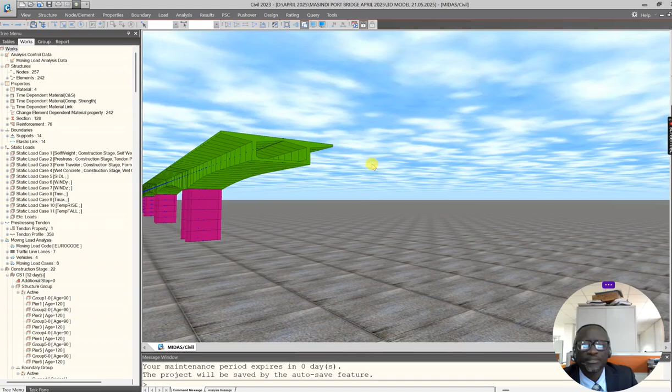This is a balanced cantilever of about five spans with twin columns, pier columns, and there's a tapering deck, which deck is a single span, not single cell box girder. This is the shape, and it's actually across River Nile.

It's a bridge under design, but this was an independent design check. That's also a learning session - we have to also learn. We have a consultant doing the design, using CSI Bridge. For me, I said let me also use Midas and see how best we can generate results, so I did that, and now we are busy reviewing.

We compare, we normally compare the made presentation. We also do and look at it, but definitely these are very senior consultants in Africa, maybe also across. The consultant is called DAR. This bridge, I think, is crossing at Masindi Port. It was designed by 2013.

In total it's 514 meters. It has a center arch piece - I would have shown you here, but there's no need, we'll get to it maybe one day. It's a full twin steel box girder, composite box girder, and the arch also is full steel box. Then we try to look at issues to do with cost.

I think the cost of steel post-COVID really skyrocketed. So when we asked the consultant to do a value engineering, putting into consideration the policy that government of Uganda has to buy Uganda product and build using Uganda product, we discovered that for structural steel, almost 70% of material would be imported, and therefore with this local content policy we wouldn't get anything.

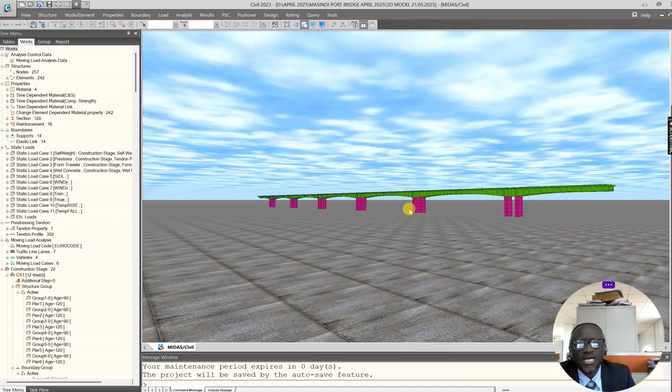So this one now is 550 meters, the outer span 52 meters, and interior span basically 90 meters. This is integral pier, though the outer span has a continuous, simply supported design to allow movement. But this one, for me, with my independent check, I moved in with this all cast all together, integral in functionality. So basically that is briefly about that.

Let me now proceed slightly. Okay, so this is the view of the balanced cantilever. Of course, in reality, from the drawing, it is doming, because here it would be like zero towards the middle, almost like maybe a meter or two, and the central span is done to take care of navigation.

I think Masindi Port in the 70s and 60s was known for navigation, and therefore we have to observe the issue of navigation. Also most of our bridges now crossing the major rivers like River Nile, Lake Victoria, Lake Albert, Lake Kyoga - it has to take care of navigation. So we are very keen on that, because we also have some knowledge on long span design and construction, and so that we have to take care of.

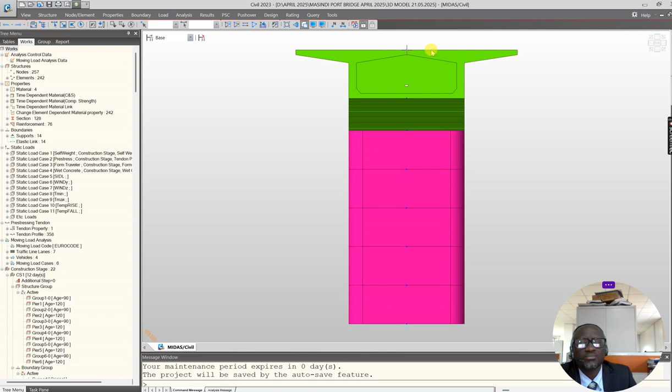So this is the bridge. The typical pier is about 7 meters. This is about 13.6 meters. When you look at it, it has a tapering - it tapers here, and then is thicker, deeper over pier support, but narrows to the closing point. This is the close around here. With a span of 90, that means this is about 45 from the center. Okay fine, that is briefly about that.

But before I go into the details of just briefly what modeling is all about, I also needed to take you through - just to feel, you know, when you are reading, sometimes you also have to do some hand calculation. We don't need to depend on handwriting, we don't need to depend 100% on typing and copying. So for Balanced Cantilever, there's some book which I read, and I got some notes - I think we shall get the reference down. So when you talk about Balanced Cantilever, here is the application.

So these Balanced Cantilever structures are bridges which involve high pier support, with wide spans, spanning wider gaps and deep valleys, areas where use of scaffold propping is a bit difficult.

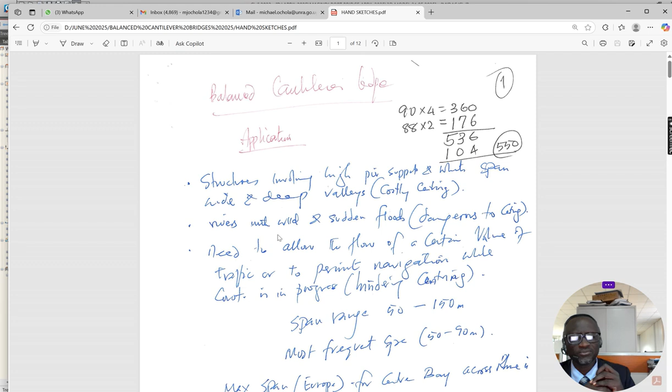This Balanced Cantilever normally spans between 50 to 150 meters. But as you will see, we have bridges that have gone past 150 meters, with center spans of 200, 230, 200. The record-holding bridge now, I think, is in Japan. We shall look at it.

The most frequent span is actually 50 to 90, because of constructability. Normally if the span goes towards 150, as you build the bridge deck, you start with the support system, then you symmetrically cantilever, moving outward from the pier support.

It has to be balanced. So if you have an error in the length, or if you're doing segmental construction and you place one segment while the other is not placed, you create imbalance. That becomes eccentric loading, combined with construction load and equipment on top, and that becomes a problem.

With long spans, normally by the time the closures are meeting, you can definitely get problems with high stress areas like the pier support system and foundation pier, because with the pile system you will have a push-pull effect, and all that needs to be taken care of.

So the most common span is 50 to 90, or 100 to 120, that is fine. The maximum span now for the center bay across the Rhine is 208, while the world record is 240 meters for the middle span.

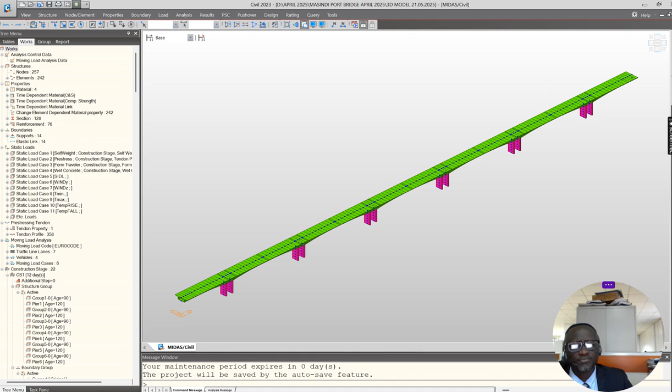You saw it from here. The middle span of the one over the Rhine is 208, but the world record is 240 at this point. That is what they're saying here. It is called the Hamana Bridge in Japan.

It was completed in 1976. You can imagine, completed in 1976, and if you look today, it's basically close to 49 years now.

Then this is the Bendorf Bridge. You see the center here - this is actually the one. This could be the one with this center bay having 208, and even 208 here.

Then you also have Hikoshima in Japan at 236, and Bendorf 208, Urato in Japan. I think Japan has longer spans than 150 than any other country in the world. Philippines has 240, also sharing the record. Urato Bridge is 230 in Japan.

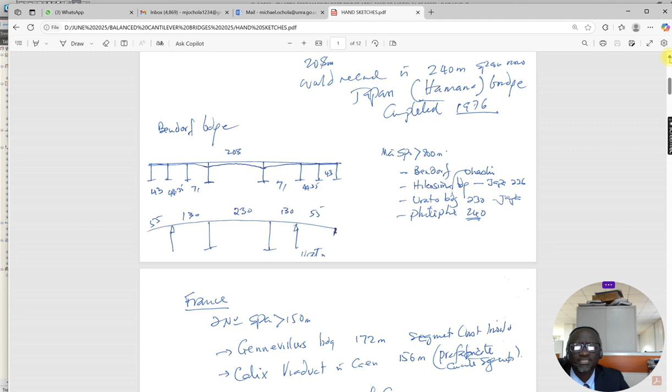So some of these sketches - in France you have 2 bridges with span exceeding 150. I think this is an option of a bridge that can actually dominate, especially for us in Africa where we have river bridges, but the rivers are not very wide. So it could actually work there.

So now you can see the different spans. In France you have the Gennevilliers Bridge at 172 meters, segmentally constructed, and the Calix Viaduct in Caen at 156, with prefabricated segments. Now, concrete, as you know, is very heavy.

Some of these bridges, you can see here, are 140, 171 meters. They use what they call lightweight concrete to reduce the weight. Though lightweight concrete has its own functional and resistance challenges, they try to reduce it because the cantilever effect is too much on the pier support.

And you see it is actually simply supported, so definitely you have to do a bit of supporting at the pier support here. You support it all the way around the pier table, then carefully place your overhead gantries.

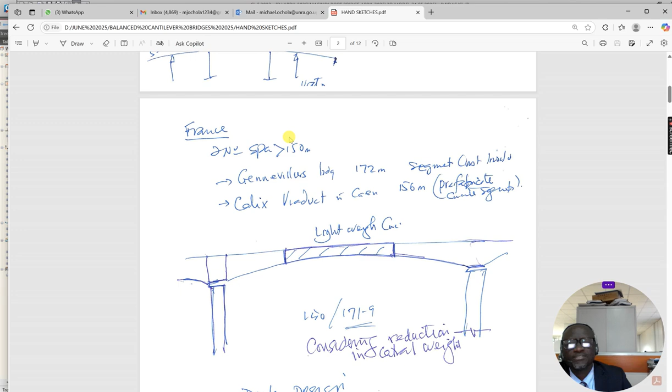If it is cast in situ, then you use form box traveler. But sometimes they use overhead gantries if it is precast segmental. This is the introduction if the span exceeds 150 and above, it's important to reduce the weight.

Then the deck design, you can see here they are saying this bridge is built symmetrically outwards from piers to avoid high asymmetric overturning moments in the piers. It has to move uniformly with no difference in loading as you go outward. This is your pier, and then you are moving. Every time you put a cast, you move.

You keep extending your form traveler until you reach what they call the closure point, and then you tie. When you tie, that's when continuity comes. So the cantilever effect is reduced, it becomes continuous once you do the closing. So balanced cantilever is actually coming from the balanced construction process outward from the pier support until you close.

Build symmetrically outwards from piers to avoid high asymmetric overturning moments in piers - not possible in practice. So the piers sustain some stresses and bending. That is why when you put the foundation pier pile cap, then you build the pier system up. Before you start moving out, the construction of the pier table has some propping system.

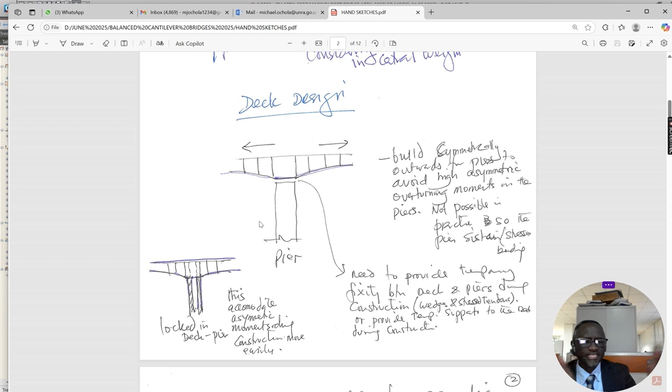Balanced cantilever - you have segmental construction, and also cast in situ, whereby for cast in situ you use the form traveler and move, while for segmental they use overhead gantries because now you have a prefabrication yard. You fabricate the segments. We shall see the dominant sizes used in the industry.

Use of temporary support needed for asymmetric construction. I was trying to look at that bridge across the River Nile at Masindi port. They have 52 here, 88 and 90, and also a bearing here. Here you have continuity, but before you reach here, there's an imbalance and instability here.

So you need a better system - once you are done with the pile cap, you build this up, and when you start construction of the pier table, you need to prop this system to achieve some balance, because if 88 is to be balanced, half of this, if this is 45, this remains 45, from that remains 43, and 43 here, and that means you need to make sure this balance is done under false work.

But towards the abutment, the next pier, from pier 2 onwards, they are monolithically cast, locked in. So that is how you look at overturning implications.

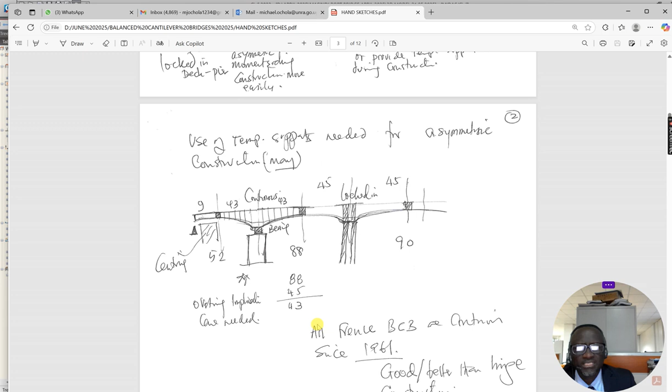This has to be taken care of, properly simulated by the contractor, cross-checked by the engineer and the design also, and then carefully observing creep and shrinkage issues, temperature issues, and eccentric loading in terms of live loads and the rest of it. I also looked at some literature, and I found that actually all French balanced cantilever bridges...

Construction since 1961. It's good, that's how they did it, and better than hinge construction.

So vertical deflection, as you ask. This is now at a closure. They are actually trying to say, once you build your bridge towards the center now, because there's imbalance, for you to have proper vertical alignment and horizontal alignment.

You have to control every stage, considering shrinkage effect and creep effect, wind issues, and many things. So you keep checking—accuracy is very important. The survey has to be done well, and then construction monitoring, observing the difference in temperature. So the vertical deflection control, and then you have to look at how they do that.

Keying—sometimes called the closure or keying segment—it provides continuity. Once it is closed, it provides continuity of the deck, ensuring integration by cables tensioned after hardening of concrete. So you have to tension that section after hardening.

The cables are located in the lower flange. So now once it closes, it becomes statically indeterminate moments which must be considered in your design of the deck. When the thing locks in at the closure, the structure becomes indeterminate.

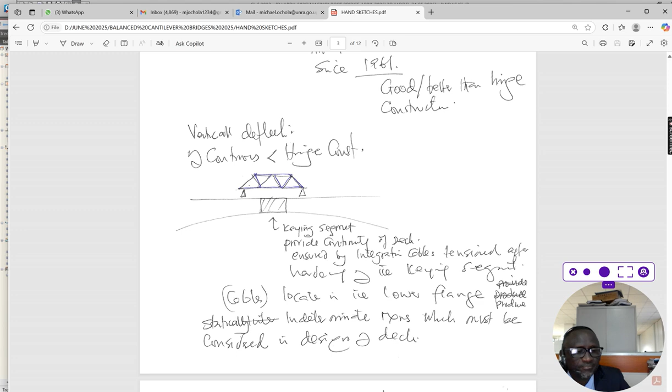That is something that I picked, which you can also look at and read more. Bending moments due to linear phenomena, variations of temperature, moisture, shrinkage effect—all that need to be considered, and may be increased if construction takes place with a large difference in temperature occurring between the upper and the lower flanges of the cantilever.

So at this point, because of these varying loads—moisture, temperature, shrinkage effect, wind and the rest—you have to have a temporary tensioning here to keep it. Once the two arms are now meeting, because it will keep moving, it's also moving, it can move like that, so there is a vibration.

Aerodynamic effects come in. I have not done that, but at least borrowing from the Nile Bridge and also reading about aerodynamics, definitely something will happen.

So the temperature—if it is hot, the bridge tends to breathe in, so it goes bigger, it tends to move. Then it also breathes—it contracts when the temperature is low and expands when the temperature is high.

So with that, wind also is happening—upward wind, sideways wind. Wind can have an angle of attack, from zero, moving down, moving up. You have seen that curve. So definitely here you have to be careful.

So there is temperature variation that can cause deformation, and therefore fixing the top of the cantilever ends to avoid deformation affecting closure. Temperature variation affects the control. So it is very, very important that at the closure, please, you have to be careful.

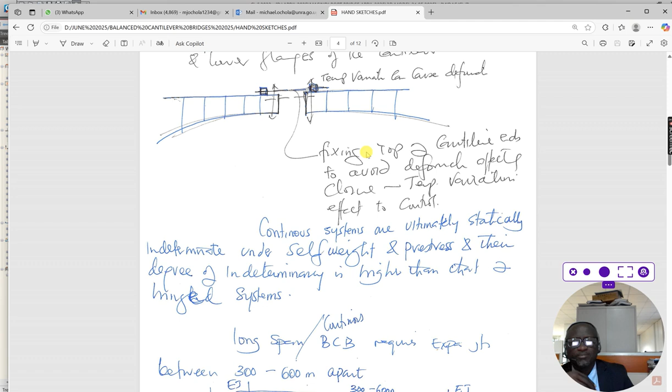Experiencing challenges arising from the use of hinges or hinge support, where these cantilevers come at this point, you don't join it—you have a hinge support here with some bearings. So you find leakage, and then failure happens here: shrinkage problems, creep issues, deformation, and many things with time, due to cyclic load and temperature and the rest of it.

So all that always causes a bit of challenge, and so you find that the continuity, in a way, tries to erase that problem.

So that's what they were saying, that continuous systems are ultimately statically indeterminate under self-weight and pre-stress, and their degree of indeterminacy is higher than that of a hinged system.

So long span continuous bridges could require expansion joints between 300 and 600 apart. If the spans are not in that range, then you don't need to have an expansion joint. Now you can see the use of expansion joint midway.

This one has implications with time due to creep deformation, shrinkage, and the rest of it. If the expansion joint is not done very well, leakage can start from here, and being highly stressed, you can get a lot of problems. So this type of construction is more or less being discouraged in a way.

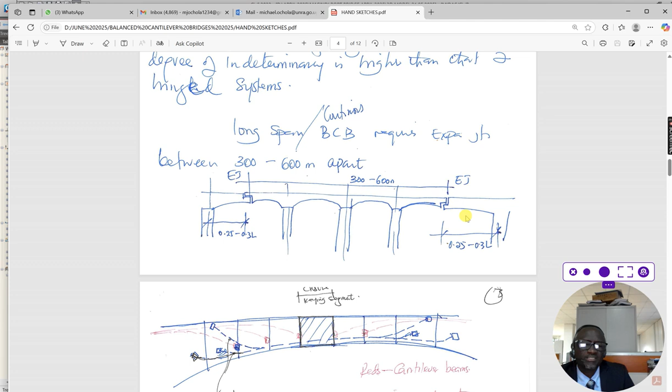It will actually move towards the support if you want, and they are telling you these are the requirements where to place some of these joints, so you can have a look at that. Then down here, this is also the closure or keying segment.

So they are telling you how to detail. How do you detail here? Engineers do the design, contractors do the construction, but you must have a good detailer to understand, and then the supervisor must be aware too.

Here they're telling you there are integration cables, then you have cantilever beams, and the cantilever beams coming from here, then the closure. Because the bending is now downward, this part becomes tension, here becomes compression in a way, and when it closes, if not, up would be tension, down would be compression.

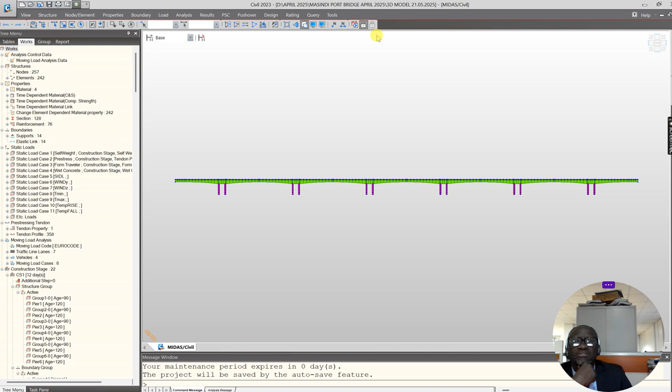But now once it closes, it becomes continuity, and this is what would happen. If I can quickly take you back here - oh, I did not run this one, sorry. I would have actually given you the moment, but let me check something quickly for you here, for the Masindi port combine. For that combine, I can look at the bending moment quickly.

Now I want to show you some bending moment. Okay, where is the completed bending moment? Here, to demonstrate that this becomes continuous once you close it. There we are.

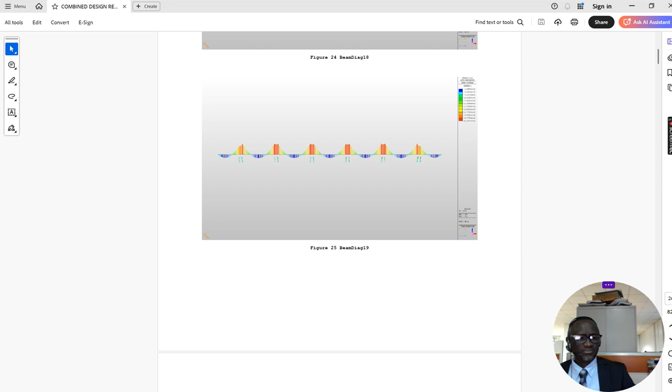So where can I increase this? So you see the closure I was showing you, this one here. So you have a closure here that becomes moment, but as you come near here it becomes... I think I should be having it that side. So here now, this blue becomes continuous after you have closed the closure, the keying segment.

But without that, I can also show you somewhere - if you have not closed it during construction, this is what happens. You see here, so now you are moving. When you start it here, now this is yet near the support system, the pier support.

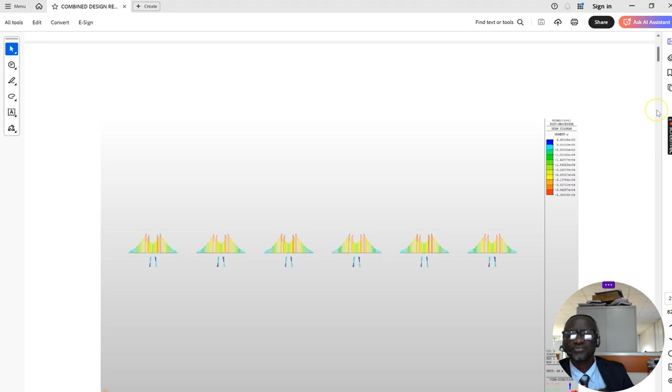Now you are moving outwards, you are moving outwards, you are moving. It's about to close. As soon as it closes, it changes, and then in service. Now that is for the deformation.

This is what you call construction staging, but with time, in the post-construction stage, you are going to have it here. When everything has closed, then this is what happens. So that is how you have to be mindful here - at this point here is what it is.

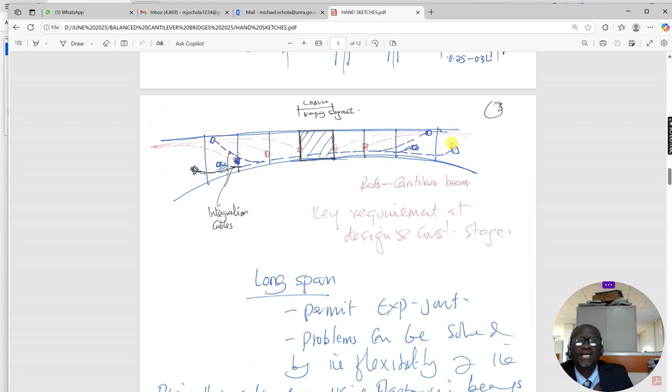So the key requirements are design and construction stage - you have to be mindful. Detailing, how to detail this, how do you make sure this point has not been disfigured. It allows that meeting point to be symmetrical, aligned properly.

Not pulling it here, pulling here to come. But definitely now with the post-stressing bars, post-tension bars, you keep it and then you close it properly and allow it to set, and then after some time I think you should be able to remove.

So long span permits expansion joints. The problem can be solved by the flexibility of - now this is when you have this monolithic connection to the pier, or the piers themselves using elastomeric bearing or sliding support. That is what they're showing here.

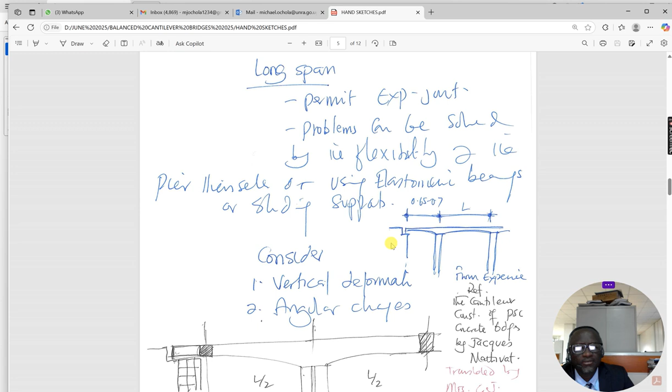Quickly, they're telling you that if the main span is L, the outer span is about 0.65 to 0.7. Many countries have different formulas for this, but definitely I've just discovered - okay, fine, others do 0.5, others 0.6, others 0.65 to 0.7. That is what normally I've seen, and we are going to see some tabulation down there of how different countries do that.

So consider vertical deformation, angular changes, and the rest of it. This is now trying just to play around with how do you make sure... that's where you have to have it. Then what remains is what goes on top.

Sometimes you can allow this to be exactly on the abutment, or then midway here.

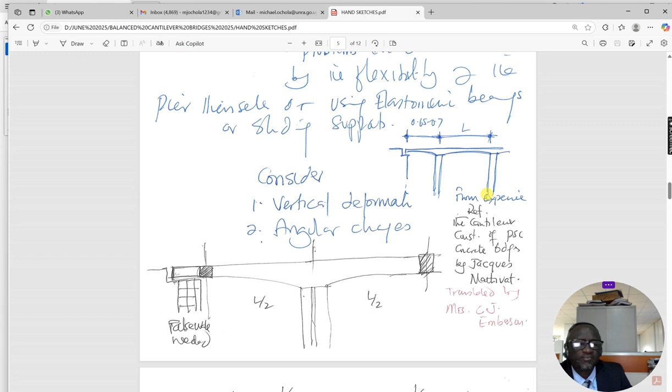The reference here for this note is actually the cantilever construction of pre-stressed concrete bridges by Jacques Mathivat, translated by Mrs. C.J. Emberson. If you get this narrative, you get that story above. So it's not my knowledge, but I just read it.

So this is another cantilever. Care needs to be taken to avoid lifting at the abutment point, or a hogging effect for the cantilever, for confidence. So here you have to be careful. It should not lift. That is why sometimes it's slightly longer, to allow it to rest.

And you have a behavior of this nature. You have a behavior here, so you can actually see this. If you leave it to cantilever, it's not good. So allow it to bear, and you have a bending here, and then the whole thing works, flowing very well.

In practice, provide the end span with always positive reactions on the abutment. Good practice to avoid the use of a device to control uplift.

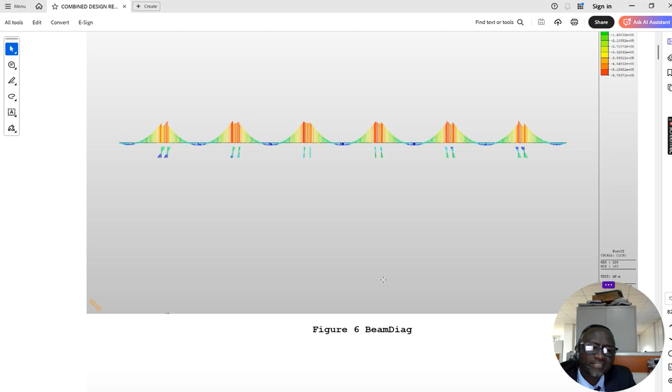Very well, you see now this one? So this one is not bad, I guess it works well. So this is implementable, but with review, definitely you have to do review. So that's what it is here.

Centered by adding, catered by adding one or two segments. So if it was 45-45, the balance, I told you it was 43-43. Now you need to add two or three more so that it pulls it down and creates a bending and a reaction kind of effect, because the other cantilever is going to marry with the closure between the two, the main center span of 90-90.

So it is very important that - but if there's also eccentric behavior, there's also what they call the use of balancing concrete, that concrete you add inside to balance. If it is not balanced well, like 45-45 for 90-90, then the 88 becomes 44, a difference of 1 meter. Still, there's going to be some weight balance that needs to be done.

So catered by adding - and so no need for false work, use of counterweight. Counterweight can handle it, counterweight is what you can do, put inside the box.

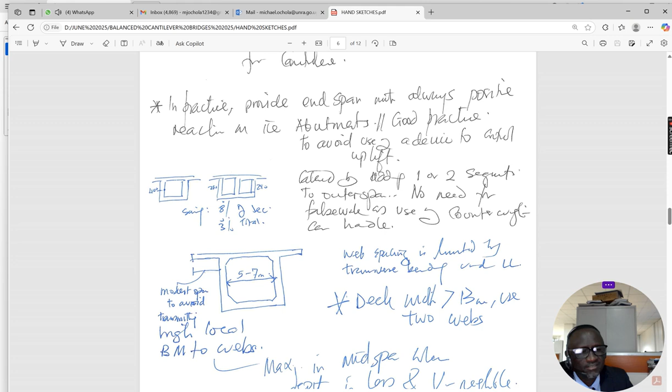So web spacing is limited by transverse bending. Now, when you are sizing these members - you can see this is a double cell, this is one cell - they are telling you that you can save 8% of the section, 3% in total, if you remove this and allow that one. These are the savings you make.

So normally you have to be careful introducing the middle web. It has implications in terms of additional concrete, reinforcement, formwork, and complexity in constructability. Of course, here they tell it has a high local bending moment to webs, modest span to avoid transmitting.

So here, to avoid the transmission of moment onto this web, you make sure between 5 to 7. Sometimes if it is too much, you do cross beams, and then also you do what they call transverse post-tensioning.

Deck width greater than 13 meters, use 2 webs. Now these are some countries - if you go to other countries, it is up to 15, others even up to 18. So it is very interesting. If you're in France, they have their own ways. If you are in Norway, they have their own. If you're in Japan, they have their own, but very interesting.

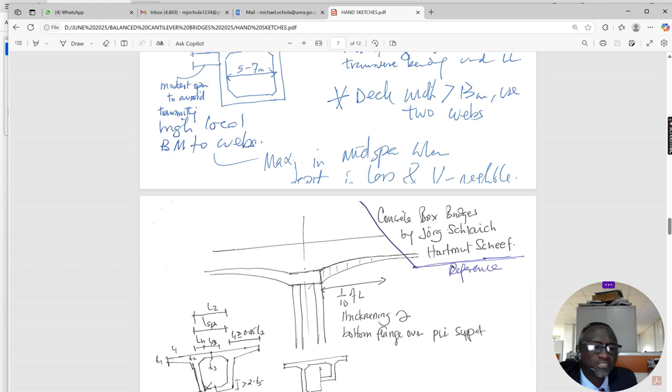But of course, as an engineer, you run also your own design to check. So that is what we have. Now this is another reference.

Concrete box bridges by Jörg Schlaich, Hartmut Scheef - this name is very complicated, looks like Russian, well, German, I don't know which one.

So basically, that is what you have, and then here they're indicating that the thickening of the bottom flange over the pier support should be about 1/10 of the span, thickening here.

So these are guides that you need to follow, and these are also some of the inclined web, vertical web. They have their benefits and risks, construction challenges, design challenges, functional challenges. So these are things you need to look at. To simplify formwork, vertical webs are therefore selected.

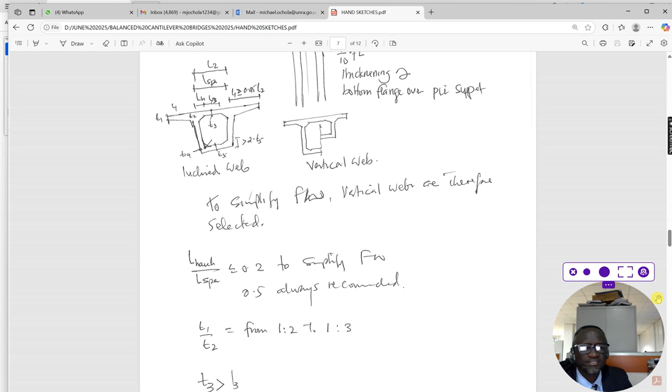So these are different thicknesses they give. I think this was something. So here is another book, Bridge Engineering Handbook, edited by Wai-Fah Chen, Lian Duan, look to be Chinese.

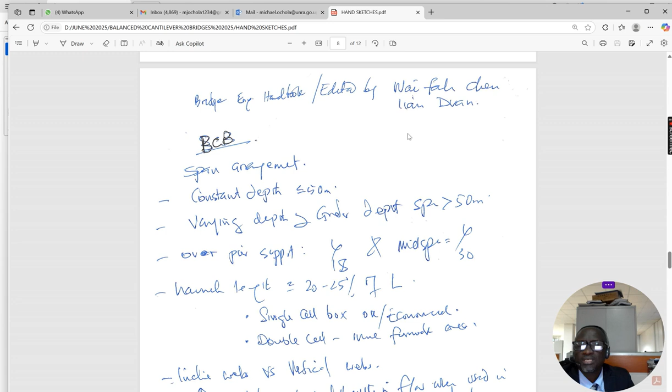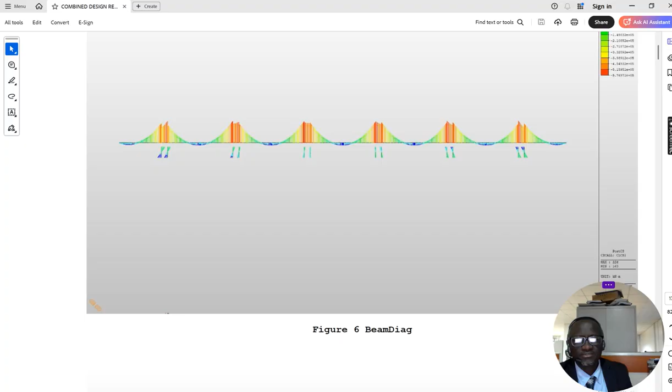Over pier support, we are using L/18 and mid span L/30. So if your span was 90, divide 90 over 18, you get the depth over pier support, and then L/30 you get the mid span depth. Let me show you this one - here is L/18 to get that depth, and here L/30. But normally it is 30 to 35. Some others even have L/15, L/20, L/25. We shall see something there, and it's very interesting.

So then the haunch length is about 20 to 25% of L. Now you see this is Wai-Fah, but the other gentleman whose name was very complicated uses L/10 - his haunch seems to be shorter than this one.

Single cell box is economical. Double cell has more formwork area. So now you have to be careful with that. Then there's the issue of incline web versus vertical web.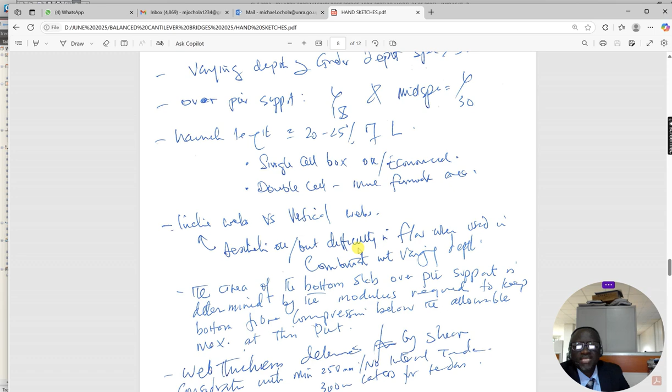Now here, it's aesthetic, but difficult in formwork when used in combination with varying depth. Incline has a problem, yeah. During construction you are moving, curving, and also the slope is there, so you can easily get it wrong.

The area of the bottom slab over pier support is determined by the modulus required to keep bottom fiber compression below the allowable maximum at this point. So these are some guidance that we need to follow.

Web thickness depends on shear consideration, with a minimum of 250 when there's no internal tendon, and 300 when you have internal tendons, because tendons have sizes 50, 60, 80, depending on the span and how much stress it is.

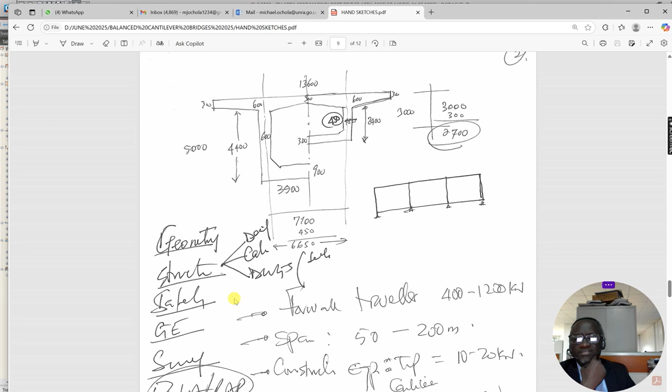So this is basically a typical one which I was trying to work on, trying to check - this is how the details were. Of course, you have to check geometry, structure, safety, geotechnical. So these are some of the parameters we always need.

Some literature mentions formwork traveler about 400 to 1,200, which is about 40 to 120 tons. Normally for mine, you can actually change it - they normally have a default, I think 70 or 80 tons. For construction equipment tip, at the tip of the cantilever, you also need to allow 1 to 2 tons.

That's why sometimes if they are not correct, then you have imbalance, and then eccentric behavior, overstressing some of the sections of the pier support. So you have to prop it in a way.

Construction live load is about 0.5 kilonewtons per square meter applied on the deck. So these are some of the rule of thumb, but it's good to cross-check, get some literature and check all the wind loading on the deck, including upward wind.

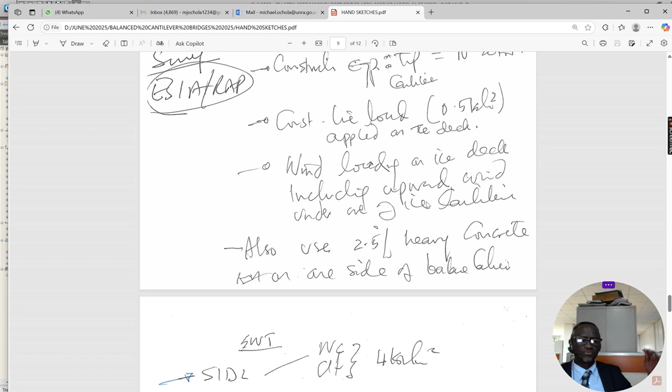Under the underside of the cantilever, you do sideways, and also you have to consider when it is going up. So very, very important.

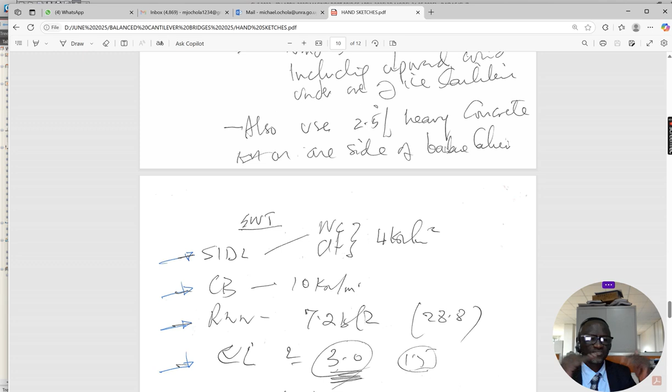Also use 2.5% of heavy concrete on one side of the balance cantilever to create that imbalance, to make sure you're creating a system that will not have problems during construction. Then the issue of self weight is always taken care of by the software.

This is superimposed dead load - wearing course. Then there is a crash barrier, raised walkways - you have quite a number. Wind is here. So these are some of the things you do for your work.

Now, when you are modeling, some of these sketches help you a lot. I always tell people that you must have some sketches to help you.

Traffic - this was SV196 being used. Stability, you can see here 1010. You have some loading, you don't have the run. All that has to be taken care of.

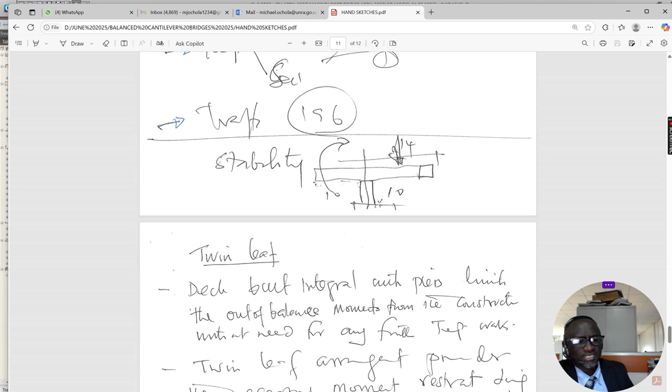Twin leaf deck built integral with piers limits the out of balance moment from the construction without need for any temporary works. Twin leaf arrangement provides the necessary moment restraint during construction without being too stiff along the deck.

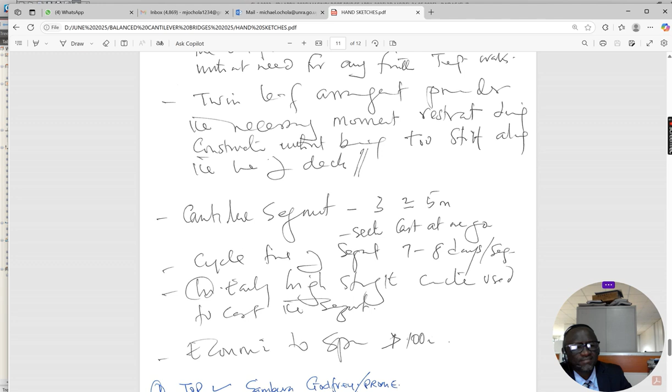So the cantilever segment they have given us here, I told you it varies between 3 to 5 meters. Segment cast at one go - cycle for each segment is about 7 to 8 days. Others have even up to 12. So different authors have different exposure to that. Early high strength concrete is required because you need to start moving, loading early.

Economic span is less than 100. So that is basically what I think we have. That is what we need to know about that.

This is another literature, pre-stressed concrete design and construction by Nigel Hewson, construction by balanced cantilever. Short span deck within formwork traveler length, form of casts suited for long span bridges where access to beneath is difficult, fast flowing water, we already talked about it.

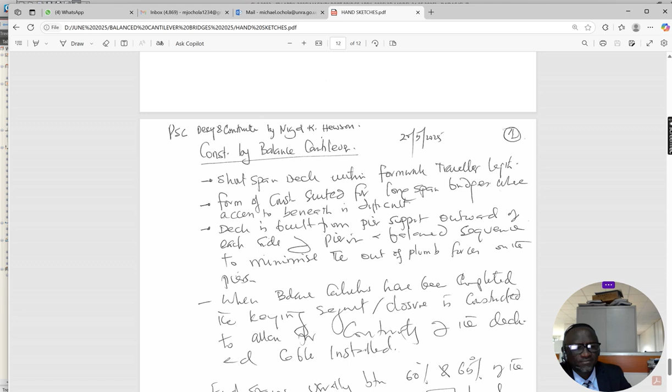Deck is built from pier support system outward on each side of the pier, at a balanced sequence to minimize the out of plane forces on the pier. And then when balanced cantilevers have been completed, the keying segment or closure is constructed to allow for continuity.

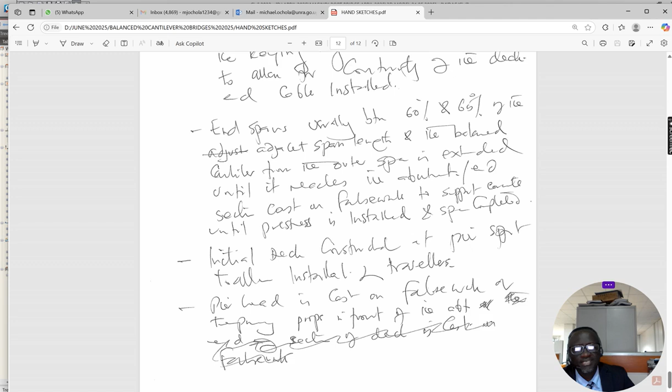I told you, and you have seen that. End span usually 60 to 65, and you see this is also from UK, it's 60 to 65. The other one was 65 to 70. So very, very important, different literature guys have their different figures. This is very important, so this is what normally guides some literature that you need to look at as your model.

So now when you come in here, these were the modeling that which we did. I can take you back here quickly. So from here, these are the modeling that I always talk about. You start with the materials.

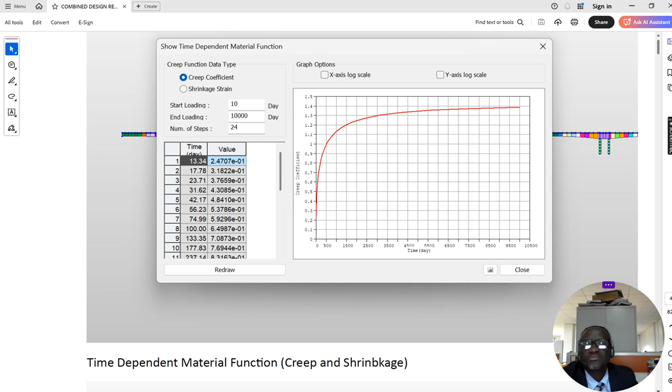Once you do materials, you come to this, this is materials, you have to specify your materials. And then you come down to tendon material, you come to shrinkage, defining creep and shrinkage, you have to do that. Time-dependent material function, compressive strength of concrete, time-dependent compressive strength.

Then here you have the tendon requirement, internal, there's also external. Then this is the total area of the tendon, there you have a duct area. Then you have ultimate tensile strength, the yield, then coming down. So you must also be aware of the slippage at the anchorage, the anchorage slippage. That is very important to look at.

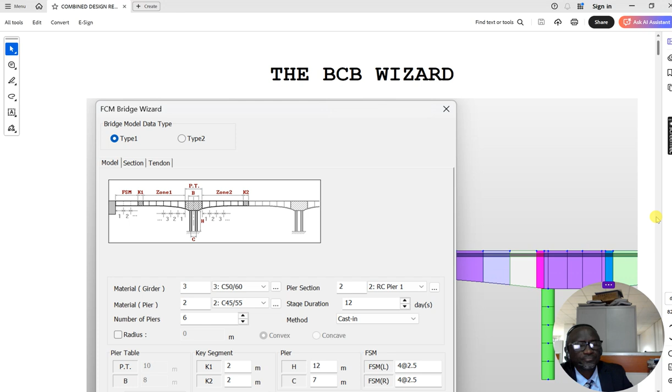So this is now the model. But when you open the wizard, this is the wizard. When you open it, you find these wizard requirements, but you need to also know the component, I think what I needed to show you, anyway I cannot get that quickly. So this is that is the wizard you have here.

And then all the requirements, material girder, material for pier, number of pier support system, you have all these details that you need to put in place. The pier table placement, member age, the zoning are all given here. So it's actually user friendly.

So this is for typical section, you can see a section here. These are the requirements, you need to have your section. If it is double, this is for type 2, you can put in that sloping issues. So you have a model section and then the tendons.

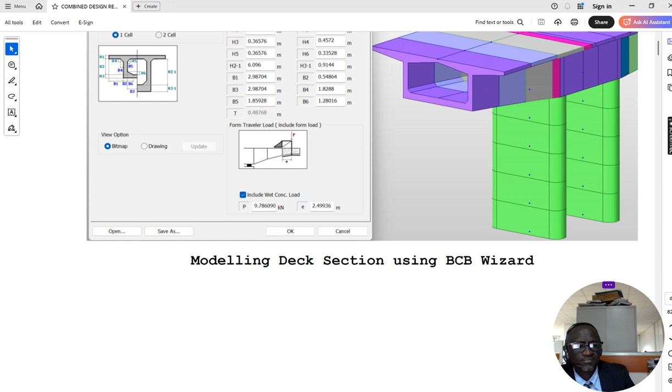So once you press all that, you should be able to run your model. So this is now where you put in your concrete load. Then you have what they call the traveler form. Okay fine, so we come down.

This is now when you're pressing tendon requirements, they're all here. This is now when you are done with all, then this is what comes out.

Then from there, there are other things, these are typical sections. Now these are the sections that appear with all other requirements, so you have to have that. These are different sections that come, so all those segments, they can all appear.

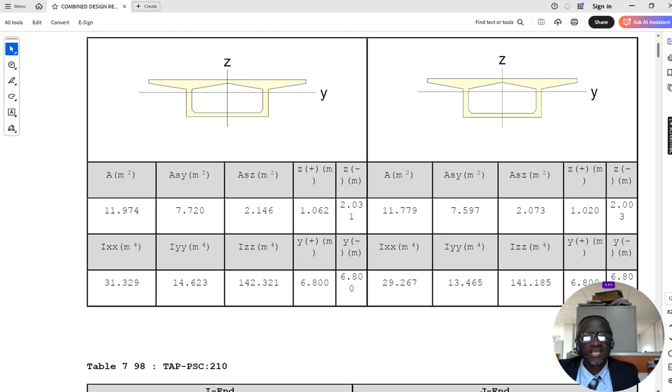But this one, the problem was giving the I and J. All those sections have I and J section, beginning and the end, so that's why it's appearing 2, 2, 2. But otherwise I would specify only I or J. So you have all these sections that you can look at, but you will have provided it in the model.

And then always important, you first draw a sketch in AutoCAD, understand the segment, draw it, understand them, then you start. So this is the output, these are reactions that you can look at, the typical reactions. But you can pick this reaction and design the pier support.

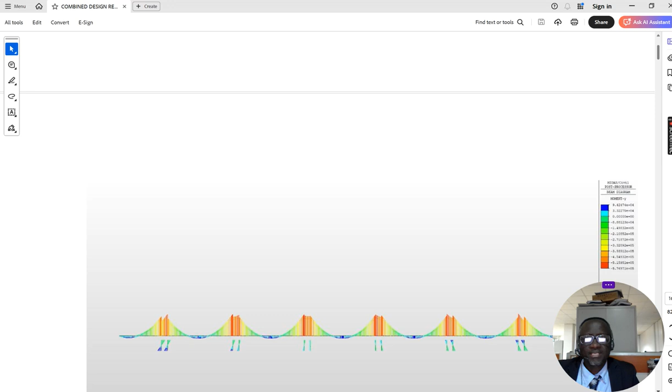No, pile caps. Then this is now when the whole moment is in place, I think service.

This is the shear forces, very high value. This is now tension - when you're pulling, using those blisters, anchored block areas, you have axial forces moving in line with the bridge, high at the support system. So it means your section also should be able to resist compressive forces, it allows that compression.

Then you also have deformation creating tension and also hogging. So you have tension, but normally for this category of post-tensioning, sometimes you don't need tension, you don't need crack, or if the crack is there, it should be minimum and manageable, because for post-tensioning bridges, if you allow crack,

then you have contaminant ingress into the ducts, and corrosion can happen, and everything can get loose, and the bridge can fail. These are construction staging. This is over the pier support. As you start moving out, you can see changes in the moment start moving, and then as you get farther away towards the mid-span, you see the moment development.

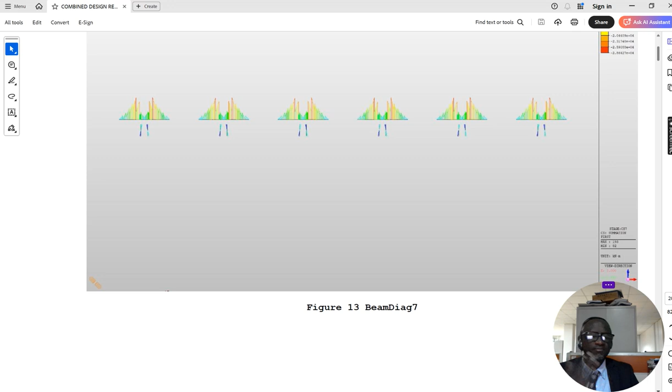During construction staging, construction loading, self-weight, equipment, traveler, you see even how the support system is also experiencing increase in the moment. So that is normally what you experience until the thing meets, and then actually you're supposed to have.

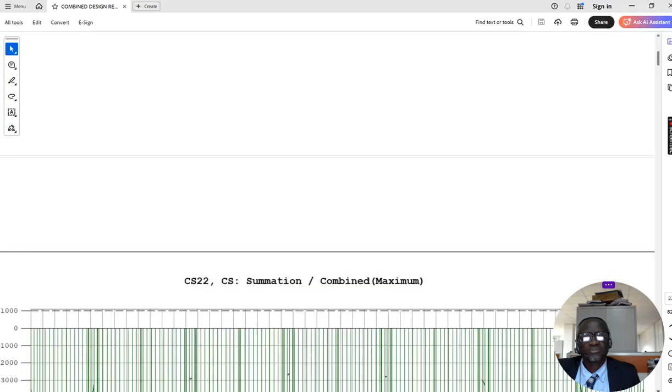Now after it has closed, you can also check the stresses. Which stresses, I think should be somewhere down here. Okay, this is now how the whole thing is moving, and then you are able to look at it. This is the stresses that you have to check.

Once the thing - this is at the end of construction - you can check. This is the limit. You look at both what they call tension and compressive forces and stresses, that should be within limit. So once it's there, then you can put.

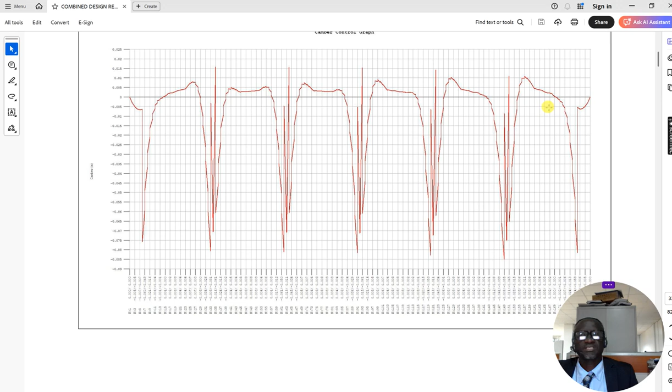This is now the camber controls. So camber controls are all here. You need to be mindful - 1, 2, 3, 4, 5, 6. So you can look at this camber, and this is what you need to do and check. So camber control also is there.

Then I think after that, after you have done all the rest you put in, then you can do a design. Over abutment, this is how the design is handled now. So now you can see this design section information - you have concrete materials, reinforcement material, tendon profile, then ultimate moments resistance, all start coming in here.

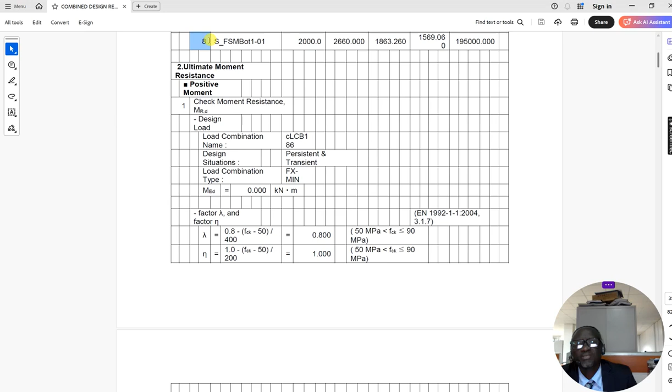Now that's where you open your real reference text and manual to know whether the design is okay or not. You come down here, so it will have all these checks. You can see after checking moment resistance, it's saying it's okay.

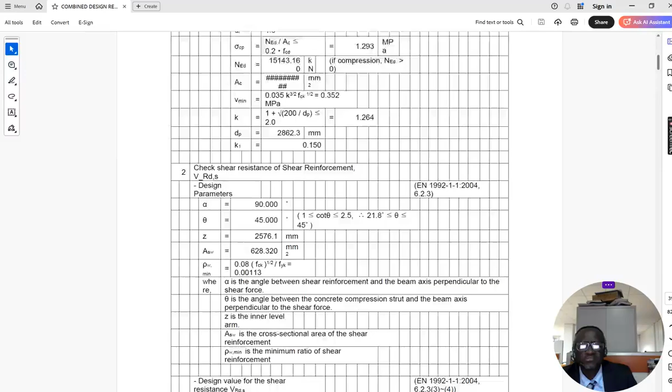That means reinforcement - you put the negative moment also is being checked. It will give you either it is passing or not passing. It's also saying okay, but summary it fails. Yeah, so depending on reinforcement you have specified and the post-tensioning system and the section you have specified for concrete, you should be doing.

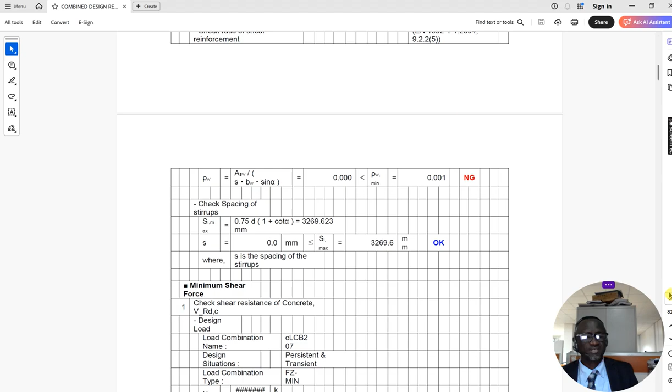So this is now testing the segment over pier support. You have to also check. So when you check all this, you find some are passing, even this is passing. Okay, and so you have to see, you're also failing. So this failure, you have to cross check your sections and then make sure you checked everything. So this is for pier support.

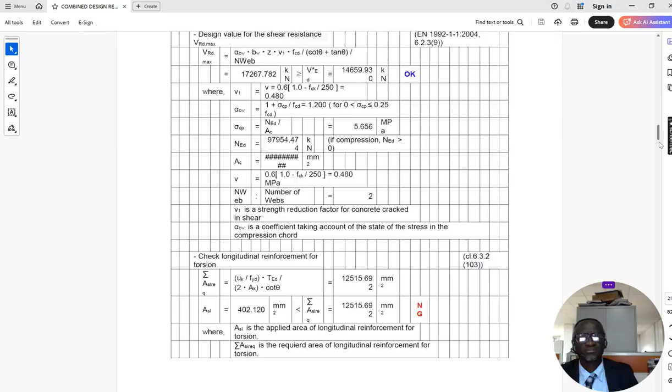Then I think after that another check was somewhere - they're basically similar, so that's why I'm just scrolling. If I get somewhere where we can save this, we could save it as narrative for you to check. I will check if there's anywhere I can post this as an article. I will save it and share with you guys. So these are some of the checks.

So also here for the pier support system, you can model this abutment. You model it properly - the good thing here, we are using Midas for everything. You model your abutment support, put in the spring constant, everything generated, have those geotechnical information, model it. You can see how it behaves. Then now you see this, you calculate all that.

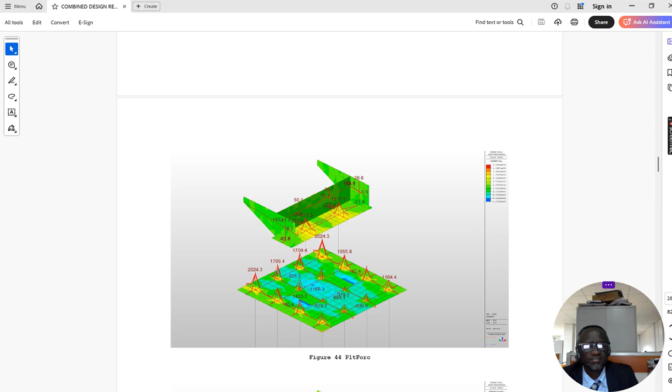Even these are the different forces on the piling, then also you can get that. Then also these are different forces, stresses in the plate of the abutment, and then it has a part that is buried - it has a column going down and then piling. So that's the thing, and then also try to look at these, just trying to go further like an artist to see how the contours behave on the abutment and the pile cap.

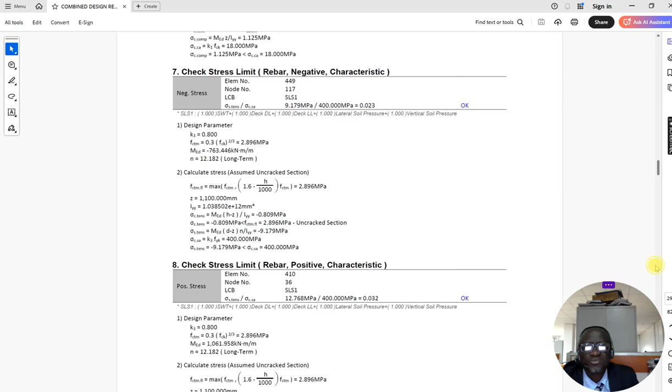These are now the design. So this is just a normal design that you know is okay. So this is for the column.

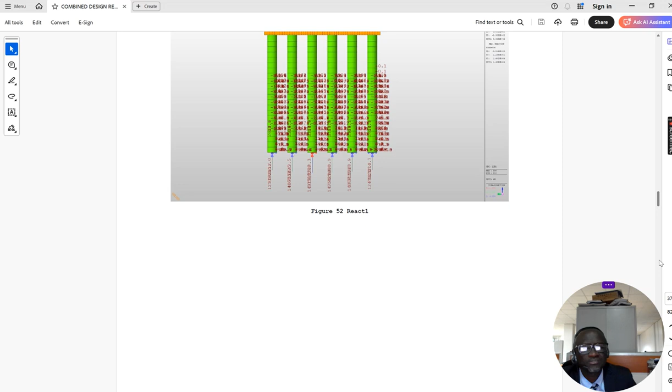This is the piles for the pile cap. Pile cap design can actually be done. This pile you model to take care of the water - you have water here, this is the river bed area, and this is now where it is anchored. So it's subject also to lateral loads. That is the pile, and these are the pile forces.

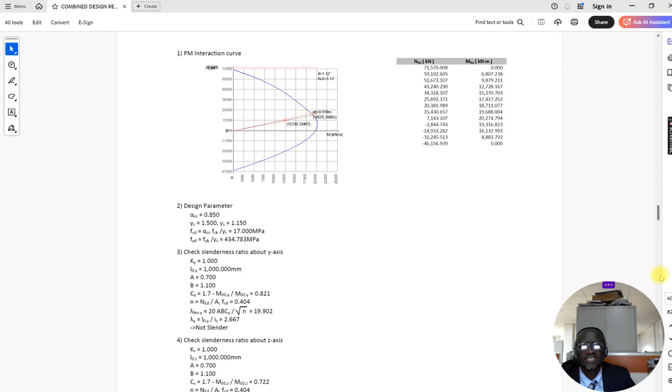Then from there you get into the design of pile caps. So all this you check against what the consultant has done. If it is not working, then you share with the consultant and they see what they can do independently. So this is about 1.5, about that. These are the different piles - okay, fine, so it repeats, no need to waste time here.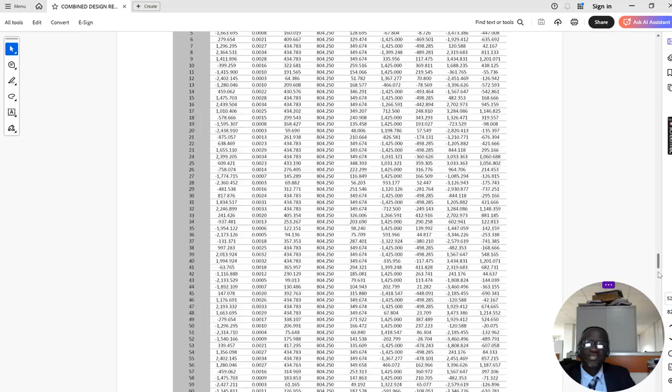And then this is the outer pier - I told you the outer pier is this one, 3 meters by 7, and it passed very well. When you find it agreeing with what the senior consultant has done, you smile because you are new in the whole thing.

So this is the transverse effect. You can do it as linear meter and check. Sometimes this also helps you size the section. So I found that it actually needed more reinforcement, or it also needed maybe to be reinforced with post-tension transfer, but the consultant has done their detailed design, so I let them handle that.

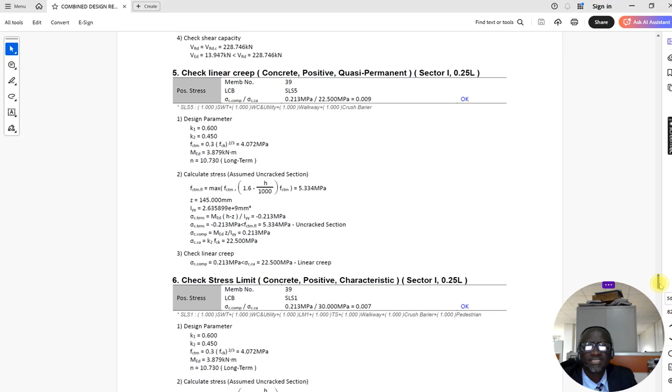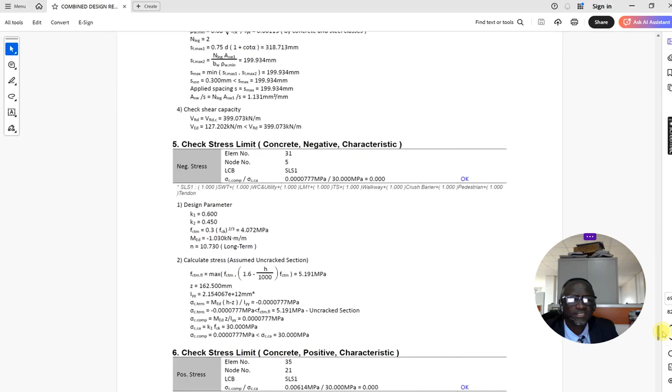So that is the design output of this. I think then this is - this is okay, I think it's repeated. This is pier, it's repeated, so it is pier and also the transverse deck. Okay, fine.

Thank you. But now I have something I need to share.

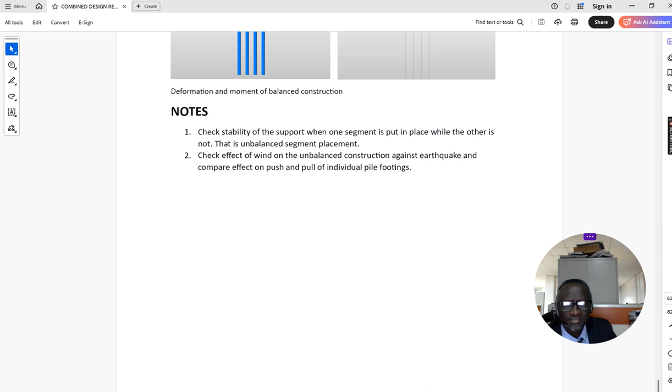This is a comparison table. If you look at this one, this is a balanced cantilever - this was Karuma in 2022. We're also doing design, but it has moved to extra dosed. I wanted to show you that even here in Uganda, I think we are moving towards very interesting bridges very soon - this is Murchison Falls along our River Nile at Karuma, so you're going to have a good one. The design is going on, but this was the earlier one. For me, I can model this to practice another thing. But it was heavy, so they had to modify it, to get something which is cost effective and lighter.

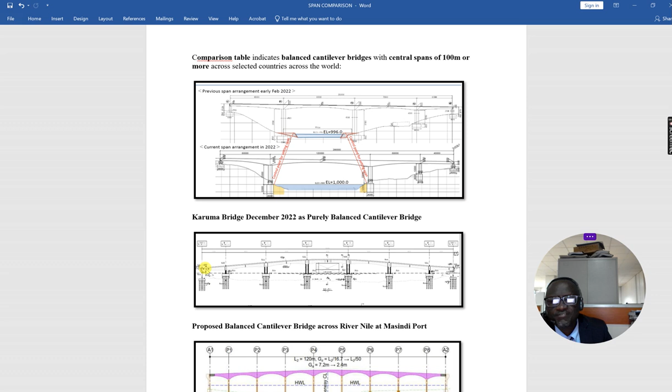Caisson piles or foundation was being proposed now. Because it's rock, they are going to use spread footing. Then down here, this is now the one we have been looking at, the one I checked. You see it is curved, but my check is not so curved, so this design needs to be flexible - flexible enough to adjust the vertical grade, then that is done.

Then the LL - so now these are some of the common bridges we do. This means when we are talking to young engineers, we have live examples here to talk to them. But basically, these are some of the bridges that we have. Now I tried to look at different bridges, comparing balanced cantilever span-to-depth ratio. Japan's Kiso Bridge has a span-to-depth ratio at pier of 8 to 12.

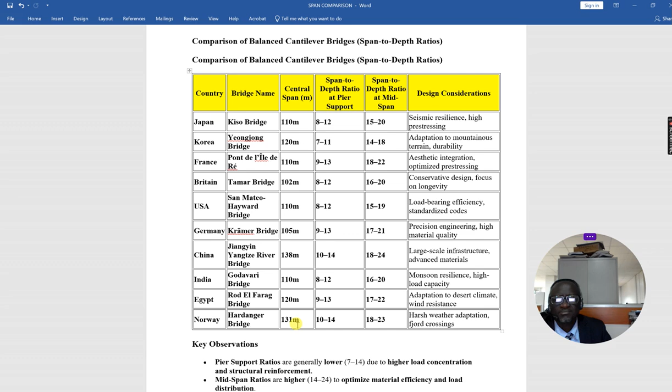Span depth ratio is 15, that's mid span. Yet in the modern construct we have 30 to 35. I think they have done research for economy and other things. Looking at mid span, they are within 15 to 23, while at pier support it's between 8 to 14, and yet now we are at 18. You saw one bridge was 18. So these are the center span. These were earlier construction, but with development it has now moved.

But what are the observations for this kind of choice? Pier support ratios are generally lower due to high load concentration and structural reinforcement. It has to be deeper and cantilevering longer, so high concentration load. Mid-span ratios are higher to optimize material efficiency and load distribution. You don't need to take the entire depth all the way to the center, it becomes too heavy.

Japan and Korea prioritize seismic resilience, leading to lower ratios at both pier and mid-span. Now you see the preference - that's why different countries choose differently, because of their preference for load response.

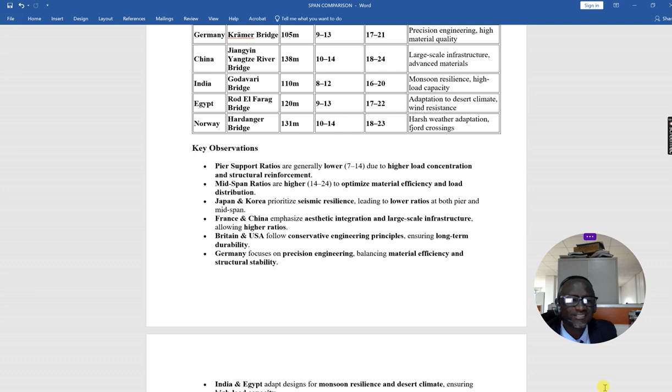France and China emphasize aesthetic integration and large-scale infrastructure, allowing higher ratios. Britain and USA follow conservative engineering principles, ensuring long-term durability. Germany focuses on precision engineering, balancing material efficiency and structural stability. I like German here, precision engineering - this is interesting, very good. Very, very good, I think they have very sophisticated technology.

Wind, you have to reduce wind, maintain wind and temperature, everything. India and Egypt adapt designs for monsoon resilience and desert climate, ensuring high load capacity. These are site-specific, country-specific things. This is interesting. Then Norway optimizes for harsh weather conditions and fjord crossings, requiring advanced materials.

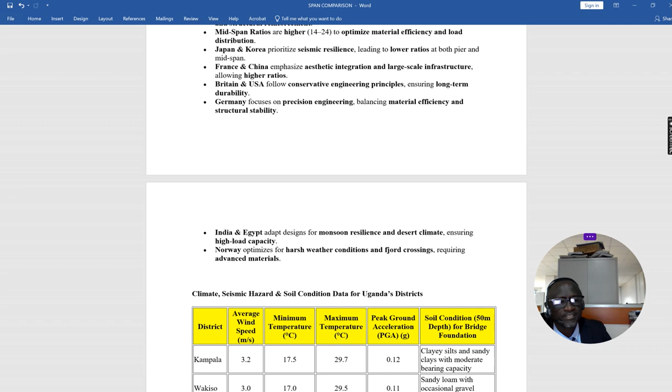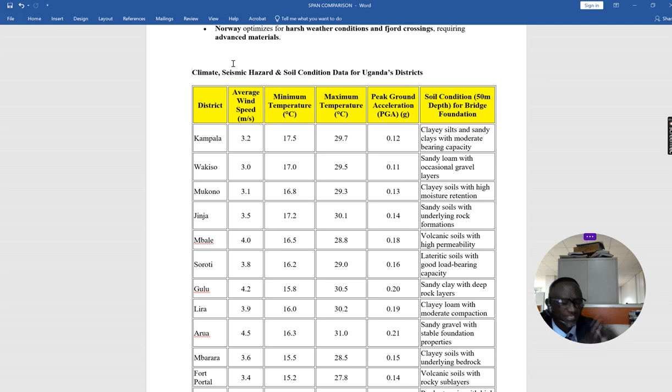Very good. Then down, I did something quickly using AI just to guide - I know it's not too much, but I'm trying to look at how we generate a national annex. So I said okay fine, we have districts in Uganda, so many, about a certain number. And I said give me average winds, let's also look at minimum and maximum temperature, and also peak ground acceleration. Try to look at it, and the soil types up to 50-meter depth, just based on the access information that it has.

I realized it gives you something - our wind actually is very low. So sometimes we end up using wind from outside, 25 meters per second and above. I know it's not very far because if I look at Jinja, it was also low for Nile Bridge, but they had to find some mathematics to push it to about 35 to 40, because we don't control the future. Temperature variation is here, but recently we had up to 35 far north. It was so hot. Then the peak ground acceleration.

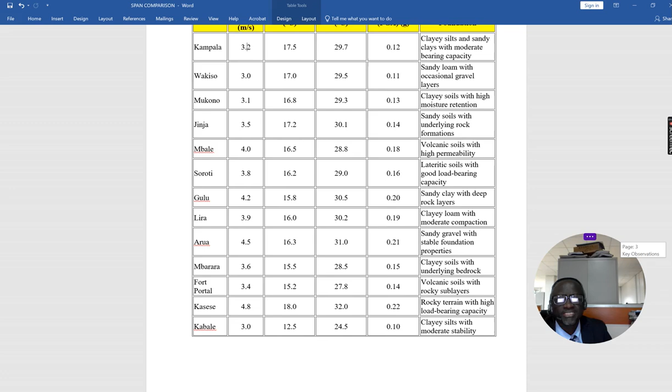And also for a quick fix, for someone to have a pre-feasibility study, you have different types of soil. You can see clay, silt and sandy clay with moderate bearing capacity, sandy loam with Wakiso, clayey soil with high moisture, Mukono, Jinja sandy, then volcanic soil, Mbale, lateritic soil with good load bearing capacity, Soroti and Gulu sandy clay with deep rock layer so you have to go deep, clay loam with moderate - that's Lira. Arua has stable foundation, sandy gravel.

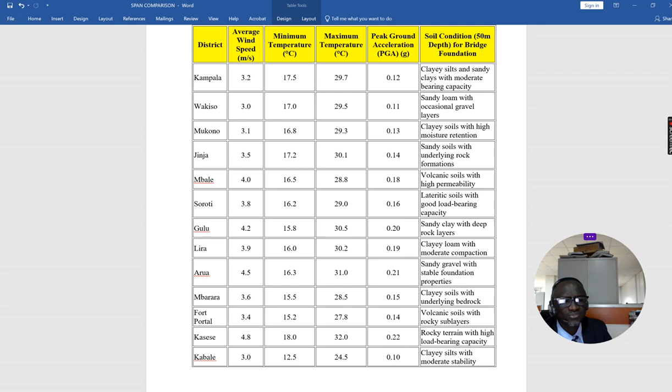Mbarara, clay soil with underlying bedrock, volcanic soil with rocky subsoil. Fort Portal and Kasese also have rock. So you find that Masaka, Hoima, Tororo, Kotido, Nebbi, Ntungamo have quite a number too. This table provides estimated soil conditions based on available geological surveys and soil types.

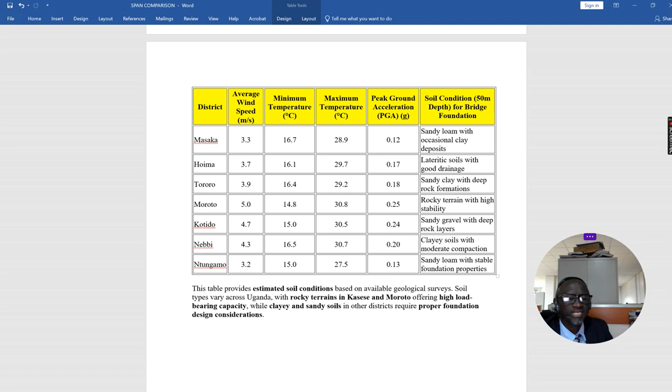Now this, of course, we shall share with our students. They can do a bit of reading, and we have about 4 Master of Structural students in Makerere. I think we shall find time and share this literature with them so that they can do some more reading to compare.